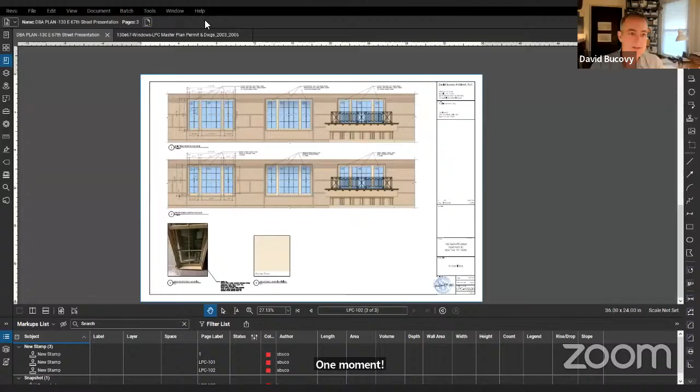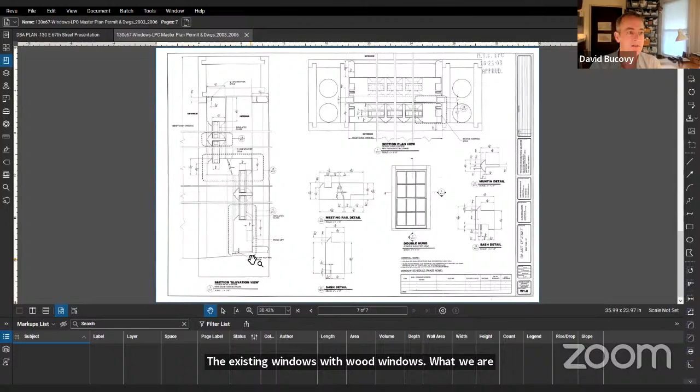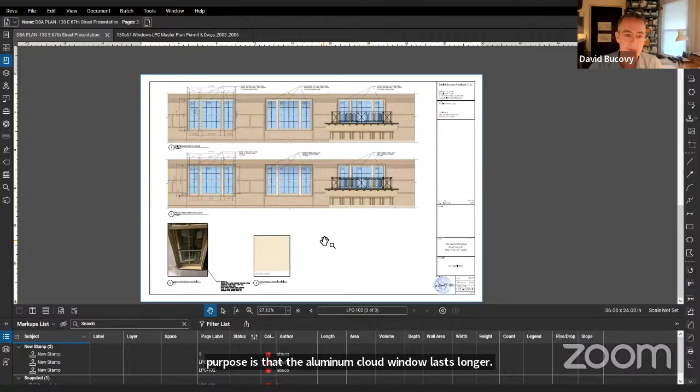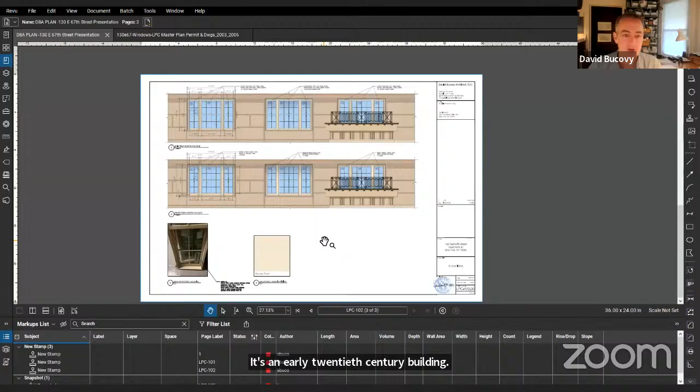One moment. So this building on East 67th Street has a master plan, which I'm showing right here, which was approved in 2004 to replace the existing windows with wood windows. What we are proposing as an amendment to the master plan is to permit the use of aluminum clad windows. These are windows that are mostly wood, but the wood is clad on the exterior with aluminum. The purpose is that the aluminum clad window lasts longer. The wood window does have to be periodically repainted. This is just a more durable approach. We understand that it is approved elsewhere in the city, especially in the context of a large building like this. This is a multi-story building, an early 20th century building. And that is essentially the purpose of this application to landmarks.

In all respects, we are going to maintain the other aspects of the window, the percentage of glazing, the muntins, the overall detailing of it. This is uniquely a desire by the shareholder of the unit to replace their window with a more durable, long-lasting system of fenestration. I believe clad windows existed in the early 2000s, but I think over the past couple decades they've become much more widespread in use.

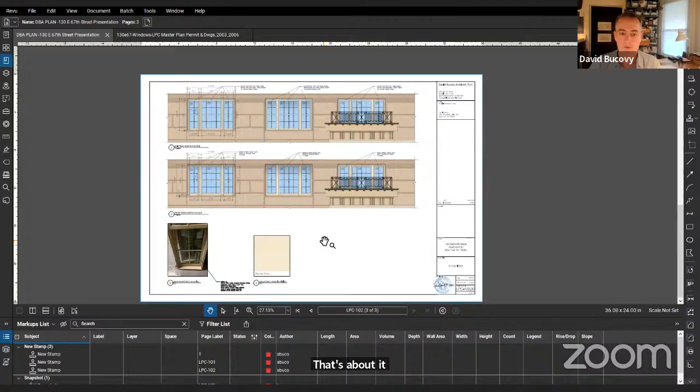That's about it. Is there anything else you want me to explain? I'll just ask you before you continue, or before we go to the public: how many windows are we talking about at 130 East 67? How many windows are there in the building? Well, I actually, forgive me, I don't have a count. I would say, just looking at the photos, that this is a corner building, and there are some kind of inner courtyard conditions. I would say there's probably 200 windows.

Okay. And when you said, are any of the windows now still wooden windows? I'm assuming some windows have been changed to the new wooden windows. Yes, there are still original windows in the building. There have been replacements. The one in 2004 was a replacement, when the master plan was created. I think from what I read in the original certificate of appropriateness related to the master plan, it was motivated by one unit owner who wanted to replace their windows, and for whatever reason, it became a master plan rather than just an individual project. And in our case as well, this effort is motivated by a current unit owner somewhere else in the building who also wants to replace their windows. And rather than, because there's a master plan, this is an amendment to the master plan, a request for an amendment rather than just a one-off individual project. So sorry, a long-winded answer, but yes, there are many existing original wood windows.

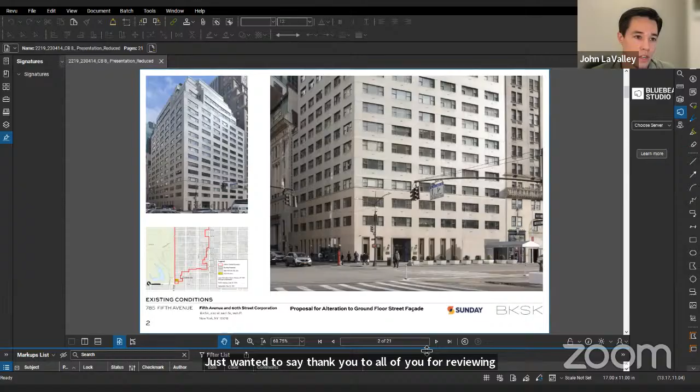The location of 785 Fifth Avenue is at the corner of Fifth Avenue and 60th Street, at the very, very tail end of the historic district, as you can see on the lower left.

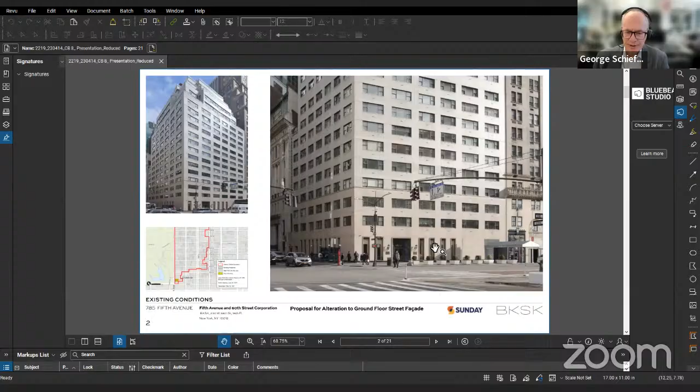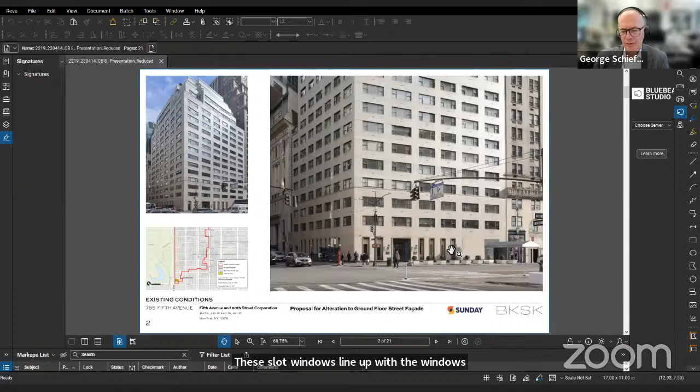Keep in mind as we go through the proposal what the existing looks like. It is a series of slot windows surrounding a commercial retail entry and a residential entrance on the right-hand side, south side of the building, on 60th Street. These slot windows line up with the windows above, and our proposal is not essentially to extend beyond those borders, but to eliminate these center piers and create larger openings on Fifth Avenue and on 60th Street.

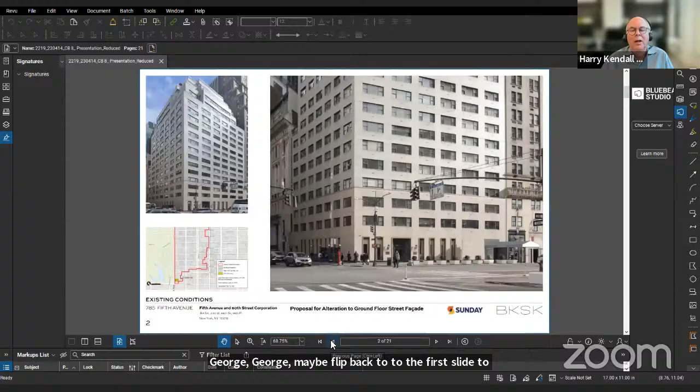George, maybe flip back to the first slide. Now that you see what we're doing, you can see the lower scale of the openings and the large sort of opaque band above them before the windows start on the second floor.

We've also, as I mentioned previously, continued the existing limestone surround all the way around each retail opening, and we have added new fixed canopies at the retail entrances. We are proposing in this rendering, showing 2 entrances. It could be 1, 2, or 3 tenants that we are likely to get for the retail space.

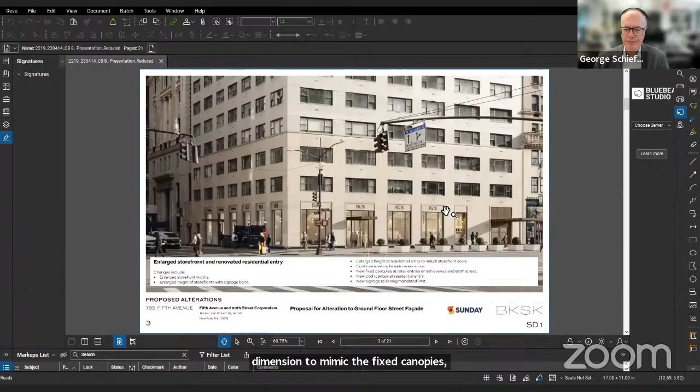At the residential entrance, there'll be a new cloth canopy with a minimal dimension to mimic the fixed canopies, and it'll extend out to the edge of the sidewalk the way the current one does. We will have new signage in the signage band above the retail entities, and that will comply with zoning and extend all the way around from 5th Avenue to 60th Street.

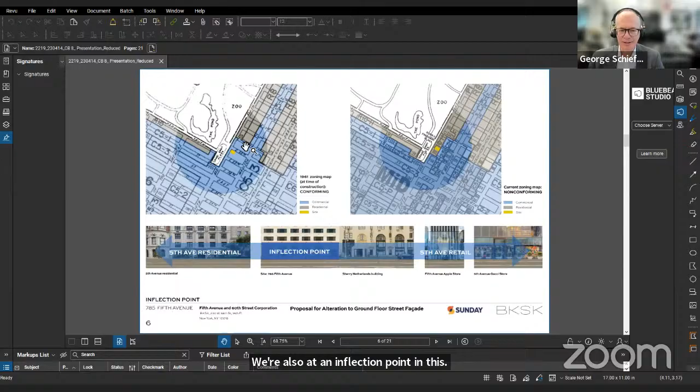We're also at an inflection point in the context. Previously, when the building was built, the commercial zone extended up past this building to 61st Street and went east to west along 60th and also 61st. Now, the residential zone continues down, includes our building, and pinches in at this point so that we are an existing non-conforming use. Our retail presence is therefore allowed to be in existence because it was in existence previously.

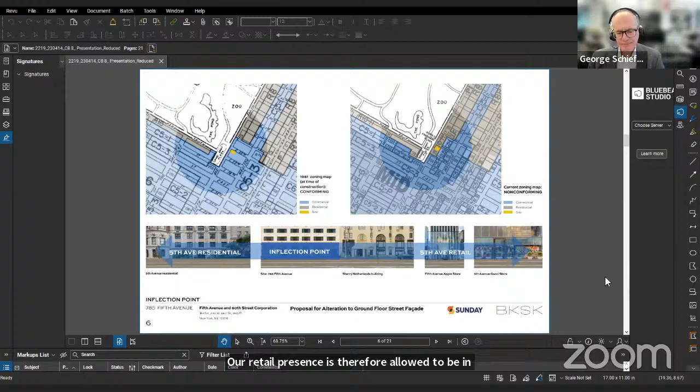When we look south along 5th Avenue, the retail of 5th Avenue begins to predominate, and the character of 5th Avenue below this block to the south changes: each individual building is primarily denoted, governed, subservient to an expression of the retail entity that occupies its space. So we get large signage, fixed canopies with signage, two-story readings of the retail. As it continues on down, we have a very transparent Apple Store and very different kinds of bases, including glass and stone.

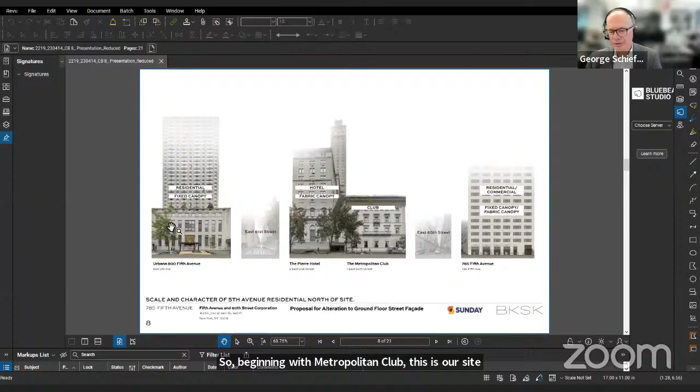As we go north on the site, it's Fifth Avenue and all of its elegance, beginning with the Metropolitan Club. This is our site, the Metropolitan Club, the Pierre Hotel, and on up to residential. Again, little expression about retail and quite an expression of stone and beautiful detailing.

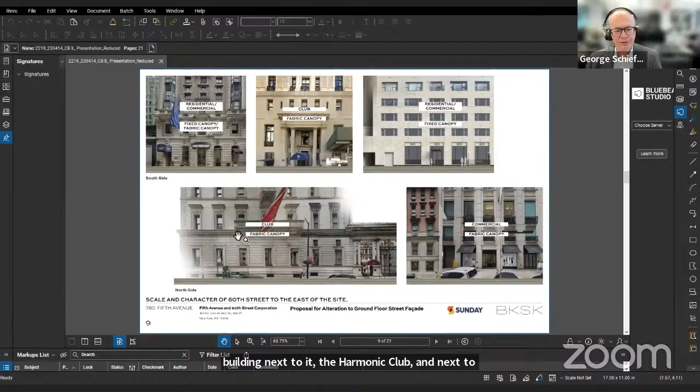As we move along eastward on 60th Street, our building is next to the Harmonie Club, and next to that, both retail and commercial buildings. On the other side, the north side, we have the Metropolitan Club, and then the former Barney's building all the way on Madison - again, residential and commercial intermixed. As a side note, the canopies are often both fabric and fixed, and sometimes the retail has the fixed canopy and the residential has the cloth, and sometimes that's vice versa.

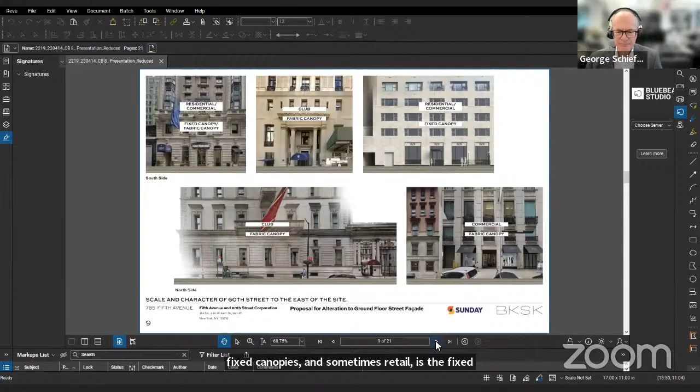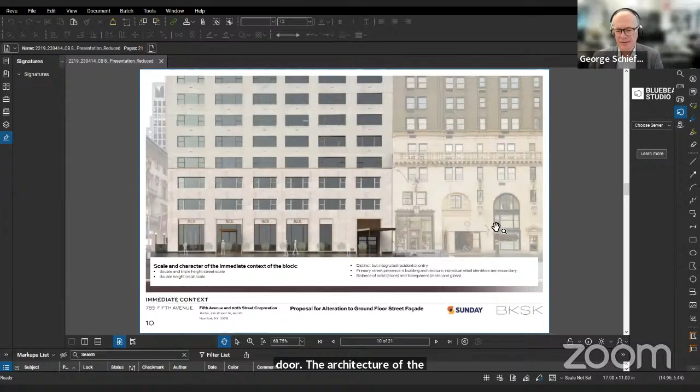Our block is at that inflection point, and it's important that the tenor and feel of the retail in this location changes, and that is what we've tried to do with the architecture. Much like the Sherry Netherlands next door, the architecture of the building, its base, its qualities, extends down to the street, and the retail no longer dominates. It becomes more of a balance between the two.

On the Sherry Netherlands, we have double and triple height scale. On our building, we've increased that scale to match to a degree what's going on in the Sherry Netherlands. The residential or hotel entry of the Sherry Netherlands is integrated into the facade and its expression, but also different. The metal and glass to either side of it and the stone at the entrance to the Sherry Netherlands is just a subtle reinvention, a reassertion of something different happening in that bay.

We are doing the same thing, extending our scale up, and then when we get to the residential entry, both separating it from the storefronts and creating a slightly different expression in terms of the materials as they move up inside the scale of the new surround. There's a balance of stone and transparent metal and glass that exists on our block, so that we are at that inflection point between a very solid retail expression and a much more club and residential expression.

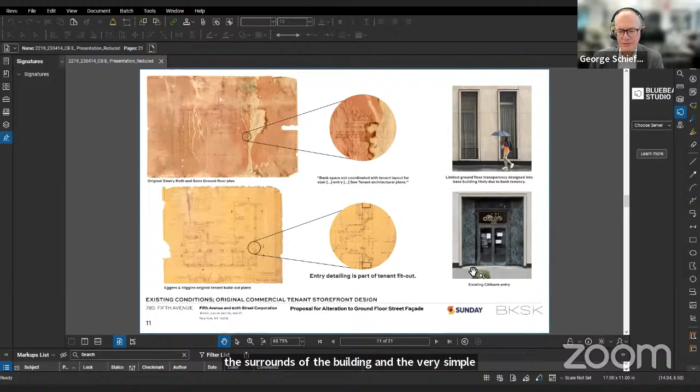Just a quick segue into what was the original intention of the architects, Emery Roth and Sons. Very poor existing drawings, I'm afraid, but enough to note that the surrounds of the building and the very simple architecture there was intended, and that at the current Citibank entrance, that was left open as a base building expression and specifically relegated to a tenant improvement.

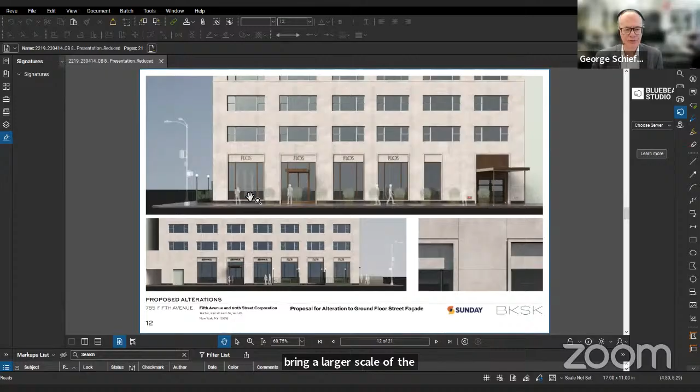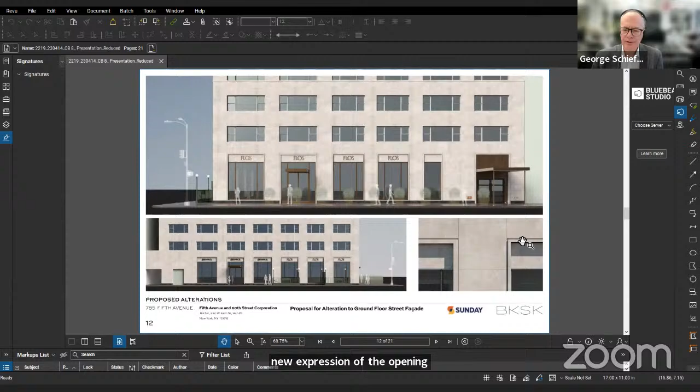So again, our proposed alterations are to bring the larger scale of the storefronts by eliminating that existing center bay. The height of the glass is what it is, similar to what it is now - it matches what it is now at 11 feet high. Then there's about a 2-foot signage band that is also expressed in limestone, and the current profile of the surround is copied and brought up and around the new expression of the opening. The only difference between the existing surrounds and an expression of entry is that it gets slightly wider at the current entry expression than at the other storefronts.

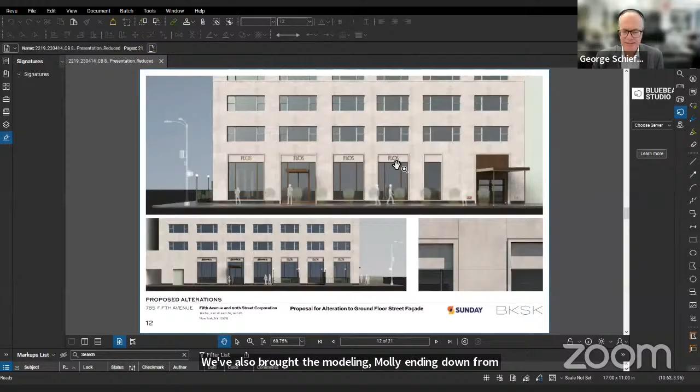We've also brought the mullioning down from above. We've maintained the scale and the height of each particular opening and the size of the glass. We've given it some differentiation by bringing that basic mullioning down to the floor, down to the street, excuse me.

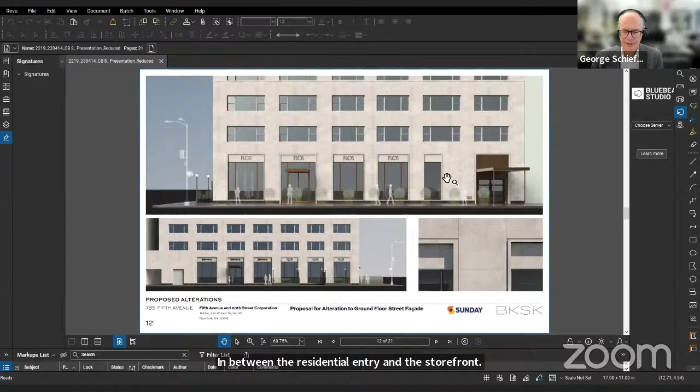In between the residential entry and the storefronts, we've added a storefront window at this point, but kept a substantial amount of limestone between residential entry and storefronts. We're playing a game between making a clear differentiation between the presence of the residential entry and the presence of storefronts, but simultaneously increasing the visibility of retail and commercial on the first floor at that point.

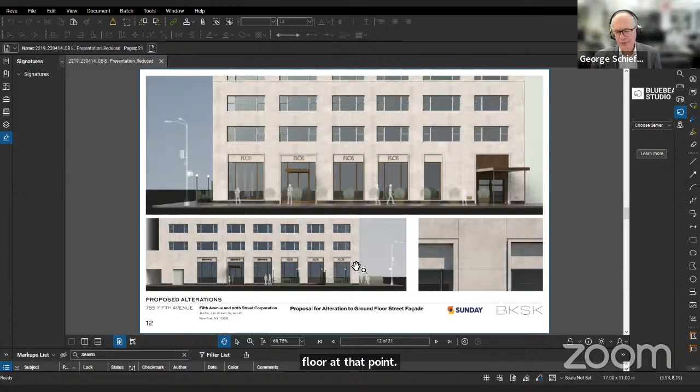This expression would continue around onto 60th Street, so that we do the exact same patterning all the way down 60th Street to the point at which there is a service entrance and a parking garage entrance that essentially remain the same. Again, there's a possibility of having a new or different tenant in, say, the last 3 bays, and perhaps another retail entry at that point.

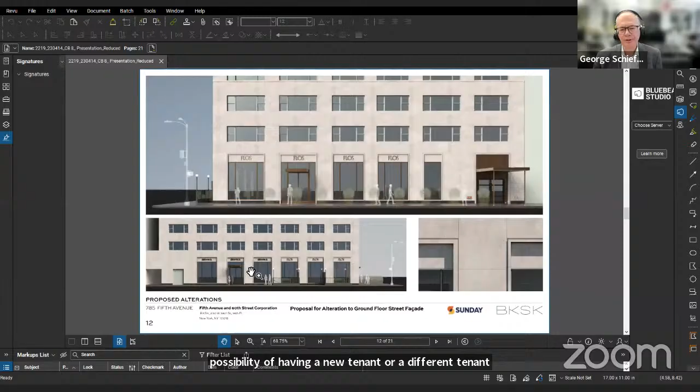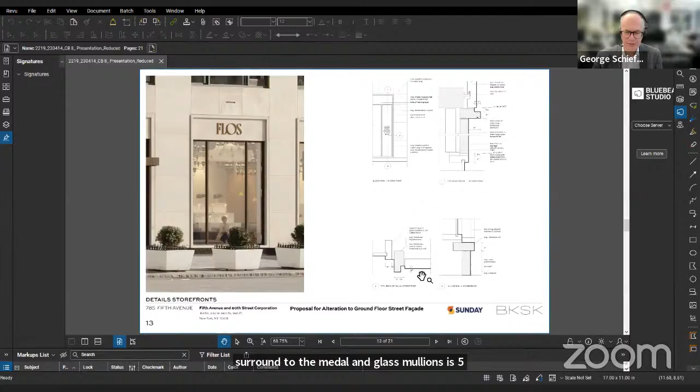That's what it is now, and that's what it would be in the future, with both the signage zone and the limestone aligned with the face of that mullion. At the bottom, the existing surround continues, and the granite sill at the base of the building, which is existing, would also remain.

Our materials are oil rubbed bronze for the metal of the mullions. The existing limestone is a buff existing Indiana limestone, with a sort of sanded rough exterior. In the signage band, we would buff hone that Indiana limestone, so it would have a slightly more polished appearance than the limestone around it. We believe all of the limestone, except perhaps this buff honed signage zone, would be existing material reused. We have enough of it and can manipulate it so that we retain the aged quality of the limestone in our new work.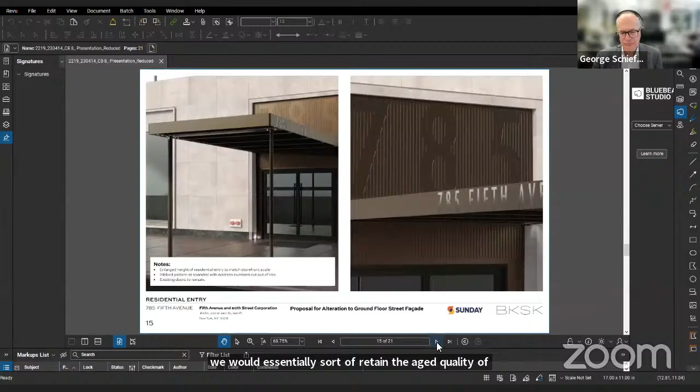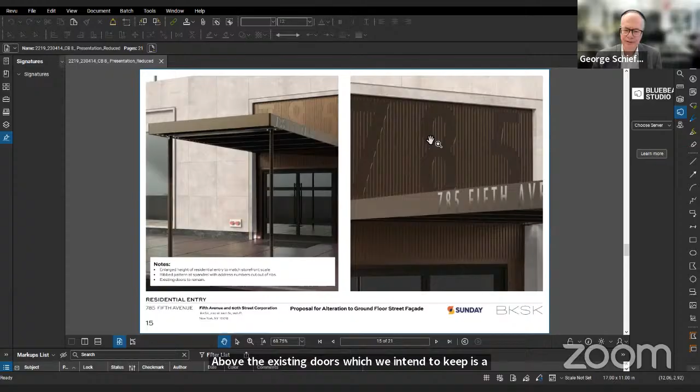At the residential entry, we are again having the scale of that entrance match the scale of the retail and commercial adjoining it. Above the existing doors, which we intend to keep, is a graphic of the address. It's sort of played down, a ribbed pattern that matches a ribbed pattern that exists on the inside of the lobby in wood, and here it exists in oil rubbed bronze. We take out the ribs at the large letters so that there's a very subtle reading of the 785.

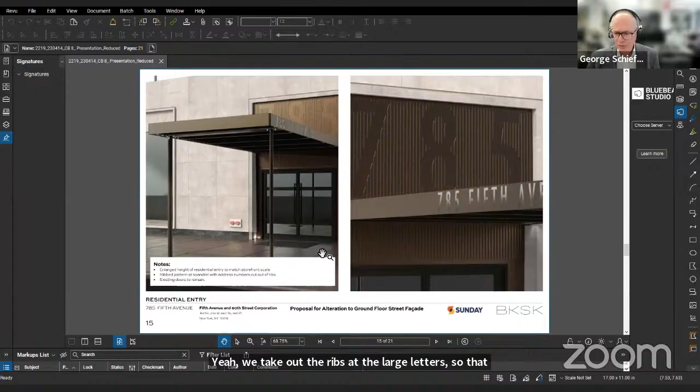The existing doors are to remain because they are special doors. They have been put in place to guard against some of the demonstrations that have occurred in the area, so they have a certain security feature to them.

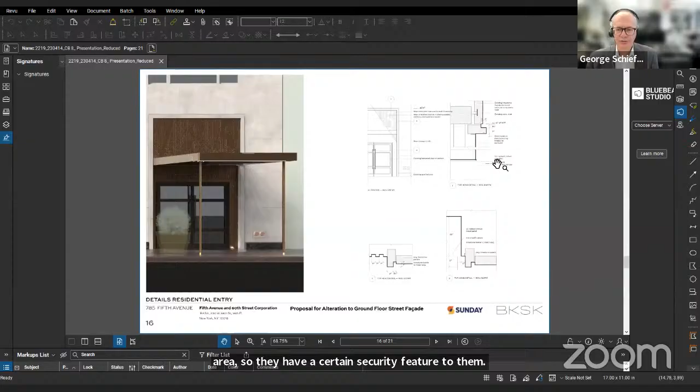The details at the entry again mimic the 5-inch recess from the face of the existing surround, showing some of the ribbing, which is 1 inch and 2 inch, and along the side where the entrance is, a deeper return to the entry doors.

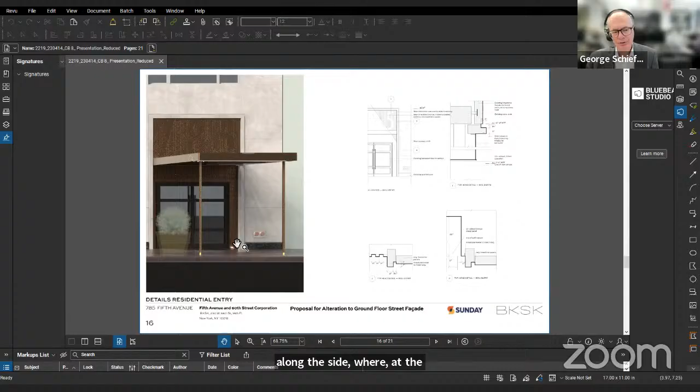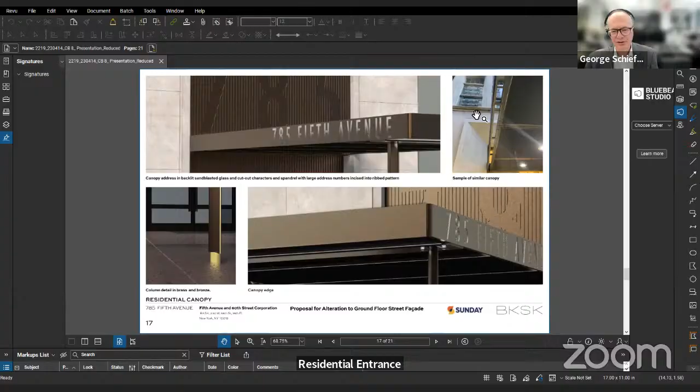The canopy would be glass with a metal border, so it has a thin expression like the retail canopies, but needs to be lighter as it extends out to the sidewalk. There's also, for the most part, a precedent of cloth canopies being at residential entrances. This is an image of an existing, similar canopy installation where there's a metal frame, and just outside of that is the continuous metal border, which allows water to drain down the edges like a similar cloth canopy would.

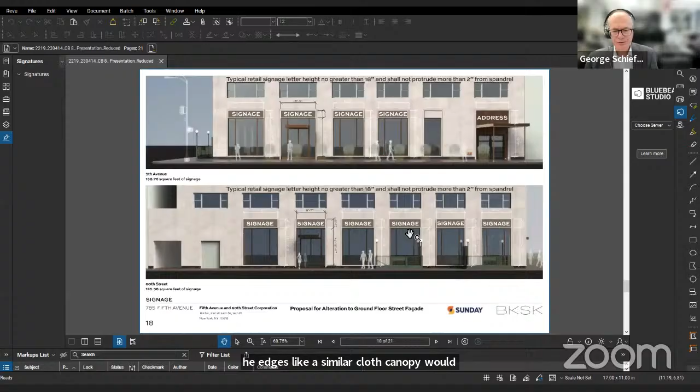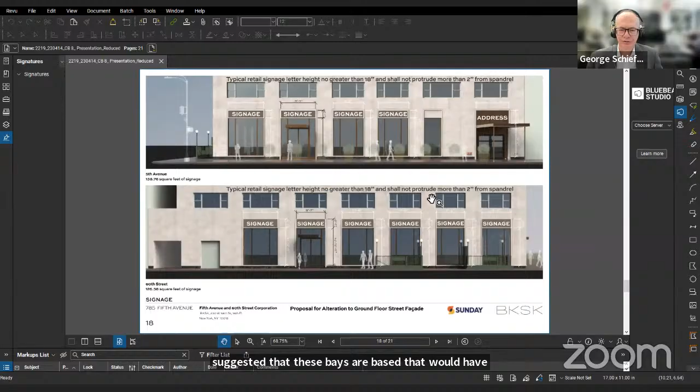Signage: we are proposing signage that is essentially in compliance with zoning. Because it's existing non-conforming, we've taken the smallest area standard we can apply to it. We've suggested that these bays are bays that would have signage for the retail commercial use on the interior. We've left this one without signage so that the differentiation between retail entrance and residential entrance is more clearly marked. The signage will be no greater than 18 inches and shall not protrude more than 2 inches from the spandrel.

We're making an argument that signage be allowed to exist in all of the bays of the commercial space. It's important to the visibility of the retail and commercial. We are at the end of a commercial presence on Fifth Avenue, and while it's important for us to be within the feel and spirit of residential development to the north, we also need to be expressive of our retail existence to anybody coming from the south. So signage becomes very important to any retailer, any commercial entity.

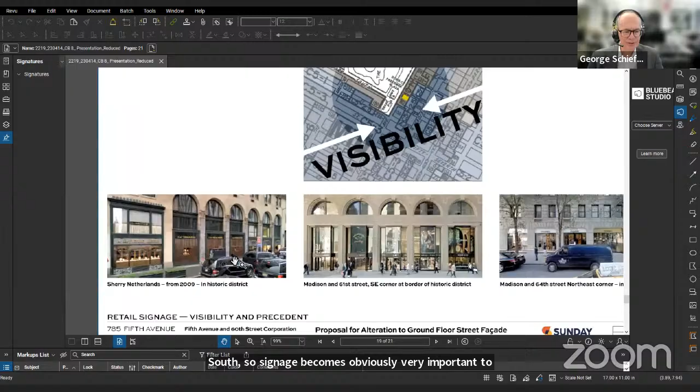A couple of examples of that: the Sherry Netherland, with continuous signage at one point in time on Madison and 61st, at the border of the historic district. And signage again between the limestone expression of the base on Madison and 64th Street, northeast corner, within the historic district.

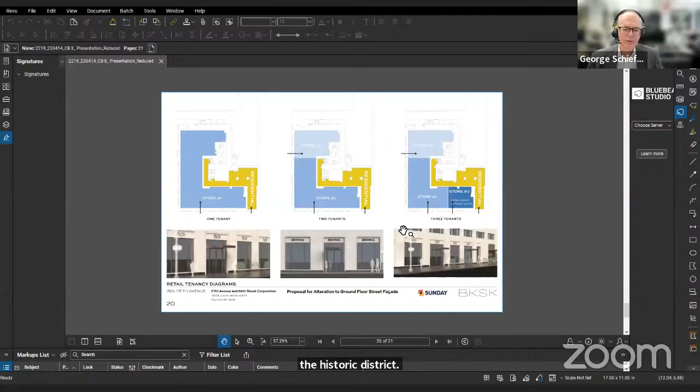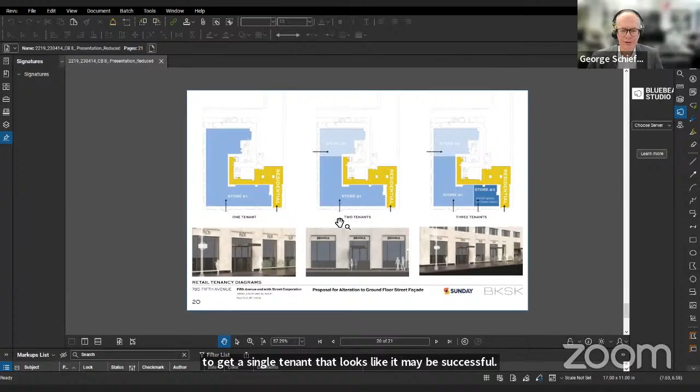We are asking for an approval that will allow us to put retail entrances with rigid, fixed canopies at 1, 2, or 3 locations. I think the primary effort is to get a single tenant. That looks like it may be successful, we'll see. But we would like the ability to have an entrance at this point for a single tenant, an entrance at this point, and an entrance on 60th Street for 2 tenants, and an entrance at Fifth Avenue and 60th Street, perhaps an entity with a small footprint on the first floor down to a larger lower level, which is also commercial as a possibility.

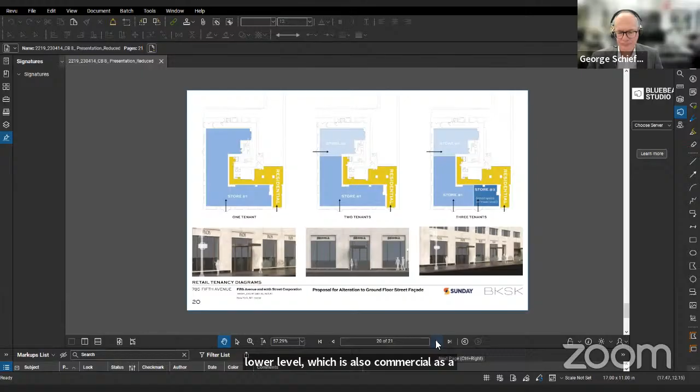That's pretty much it. Thank you very much.

We feel our proposal enhances the street frontage and doesn't detract from it. We've had some good support from the neighbors. Robert, you might want to just quickly run through our community outreach.

We did extensive community outreach, and every entity that we reached out to that asked for a briefing, we gave full briefings. The buildings to the south, east, and directly to the north, the Sherry Netherland, the Harmony Club, and the Metropolitan Club, collectively wrote a letter of support, which we submitted to Saida on Friday. They were excited and saw what we're proposing as enhancements that would improve the neighborhood and improve the building.

The only other thing George touched on, but I thought it might be worth saying a little more about the tenant improvements that were there versus what the architect intended originally for the ground floor. Can you touch on that again, George? Go back to the existing drawing sheet.

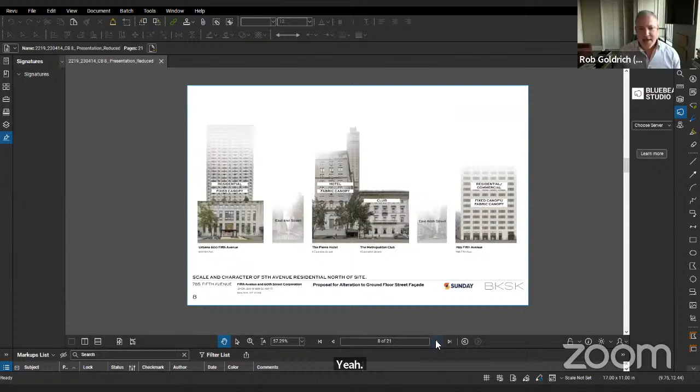It was a tenant improvement to reflect the nature of a bank tenant and what they needed during the time, but it wasn't part of the original drawings. As an architect, I think what you're getting at is that the nature of a bank tenant when this was built was of a private bank that would have wanted privacy, and the nature of even a bank tenant at this point is very different, looking for openness and exposure to the street.

So that is important to what this particular co-op is trying to do with its retail presence on the street. Did I cover what you were looking for there, Rob? Yeah, I think that explains it.

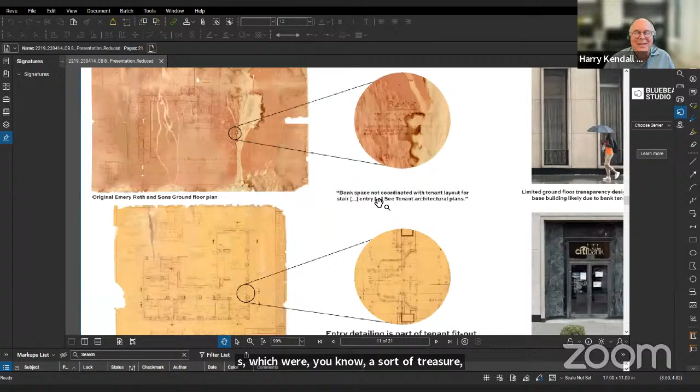What we learned from the original drawings, which were almost lost to history, is that the building architect, Emery Roth and Sons, we think knew it was going to be a bank tenant and delivered the smaller openings because they thought that was appropriate for the level of protection a bank would offer in that era. It was the predecessor to Citibank.

Citibank wasn't the original tenant, but Franklin Bank ended up joining Citibank as a larger entity. So then it was a separate architect, Eggers and Higgins, that did the build out and the details of the Citibank entrance. The intentions of the original architect were just to attract the right tenant and deliver that balance of protection versus visibility that a bank required in the 1960s.

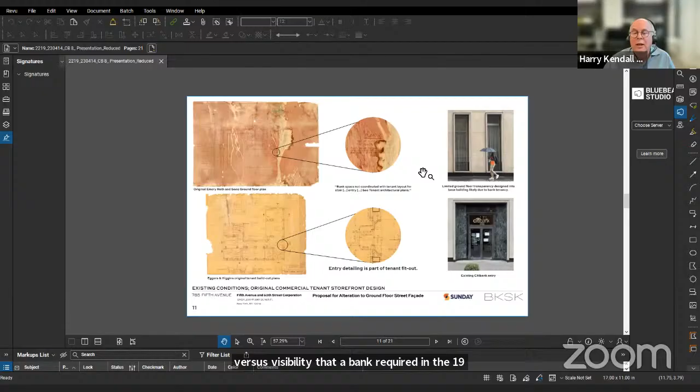Things have changed a bit, and in all candor, it wasn't the most elegant solution at the base. As George said, we think what we're proposing ties the upper floors and the lower floor together in a way that the building had been wanting. But I really leave that to you to discuss.

Well, thank you for a very thorough proposal. Let's go to the community and see if anyone has a comment.

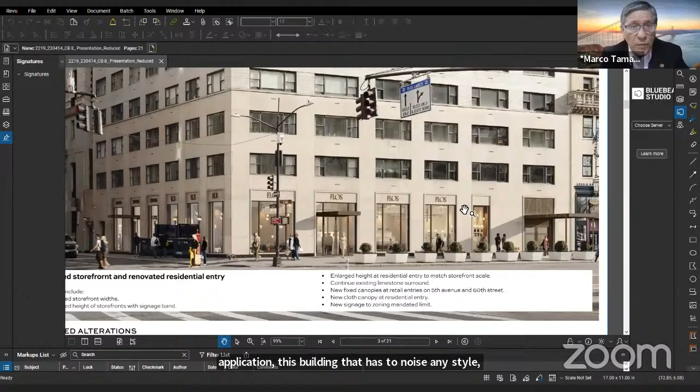I think it's a very reasonable application. This building has no particular style, and I think that allows a large flexibility to propose something different. George, you did a very good presentation. Even though when you speak too much you confuse everybody and lose your presentation, I'm sorry for saying that, but the presentation was clear. Sometimes you made me change my mind, but clearly you did a very good job. Your proposal improved that part.

Yes, I have some comments that made me a little concerned. Is the signage too much? I know that you use the zoning resolution to establish the dimensions, but I don't know if it's too much. It depends on the tenant, and commercial spaces always need more signage. I agree with that part.

The canopies, yes, they don't bother me so much. I think it's another way to establish the differentiation between one tenant and another, and that is perfectly fine. And the part that made me a little concerned, even though it is nice, is the number on the residential entrance on top.

It is covered by the canopy, and you don't need to make the numbers so big. That doesn't work unless you are across the street, probably, and for the rest you're not going to have this kind of information visible.

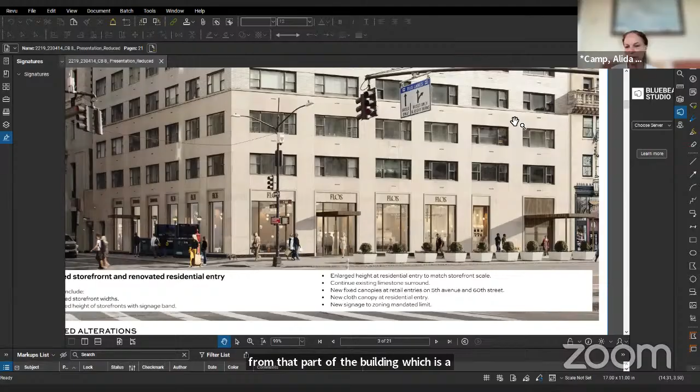Thank you, Alida. Michelle? Yeah, excuse me, thank you. Presentation was clear and it was excellent.

Let me start going from my side, right to left. I don't know how you're seeing it. The 785 that's set into the facade above the canopy over the residential, I think it's a nice use of those materials, but I don't think it's needed here. I think it's overkill and intrusive. So from my point of view, I would like to see the numbers eliminated. If that happens, I'm not sure what you would continue with, I guess that's the bronze, or you would have the limestone infill. I'm not here to design it, but I would like to see the 785 removed from that space.

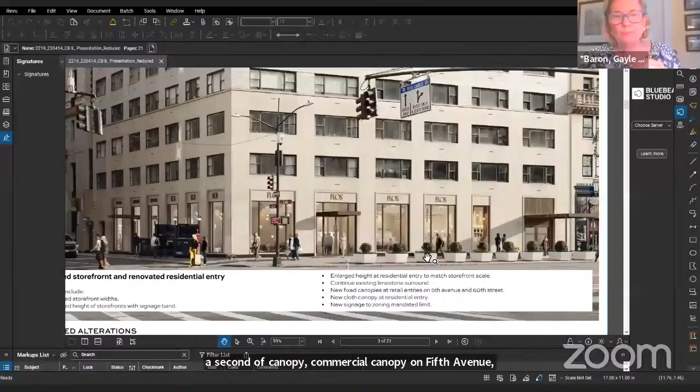I also agree with Marco and Michelle when it comes to the 785 being on the canopy, and then having, interesting as it is, the 785 among the ribbing. I still think it's a little overdone—you can see the address once and know where you are. I also look at the signage bands; I think they're a little large, but not enough to really concern me. I'm also not certain that even if there were a second commercial canopy on Fifth Avenue, it would necessarily look out of place. It might end up balancing the three large windows overall.

I do have a question regarding the oil rubbed bronze. Is that the same color as the windows above? No, it will not be. The windows above are very garden variety aluminum. Okay, those are aluminum and all. So it differentiates itself from the residential portion windows above.

There are certain things I'm still a little concerned about, but overall, I think it's an enhancement to a building that really does not shout out 'come look at me.' So I can support the application.

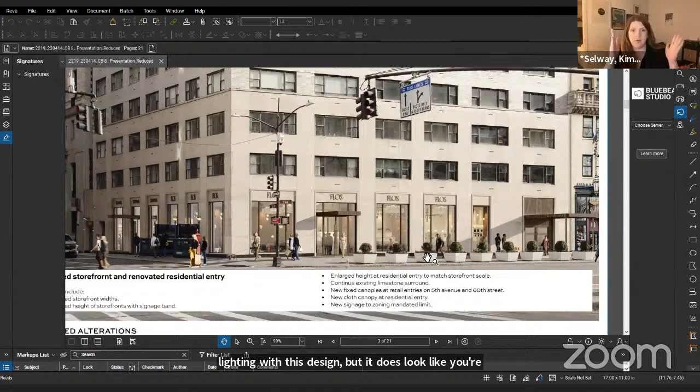Kimberly? Thank you, Aida. To echo what my colleagues have said, thank you so much for this presentation, it was very thorough. I did want to clarify something Michelle had asked relating to lighting, because I believe you said there would not be any additional backlighting with this design. But it does look like you're removing the existing lights around the commercial entrance and around the residential entrance on Fifth Avenue. That's correct.

Yeah, we're removing those sconces. I think I can support this application. I am a bit concerned, to echo what Elizabeth said, about the signage above the residential entrance. But overall, I think I can support this.

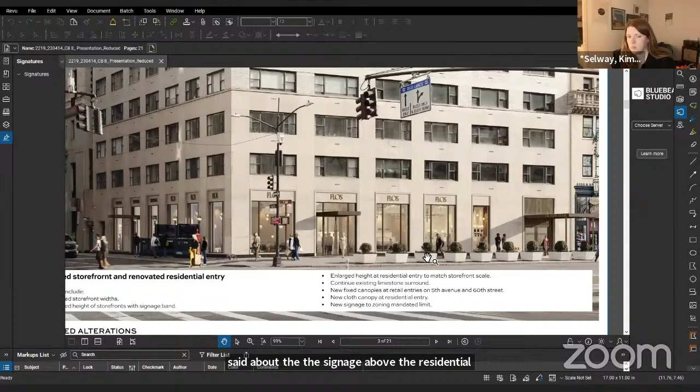I'll just make a couple comments, echoing an email I received, and David received a little earlier, from Anthony Cohen, who couldn't be here tonight. It has to do with the exaggeration of those openings, and that there was some merit to the existing layout—the narrower windows that went with the apartment windows above, fitting nicely within the bays. I know everyone wants more glass from retail, I understand how important it is in New York, especially these days. But somehow I think those narrower windows were more effective on that particular corner and going around the corner. So I cannot support the application.

Thank you. David? Well, co-chairs don't always agree, and I can support the application. I think it's very well done. I think we do have to be respectful of the fact that this is a commercial ground floor, and that in order to get tenants, they need better visibility.

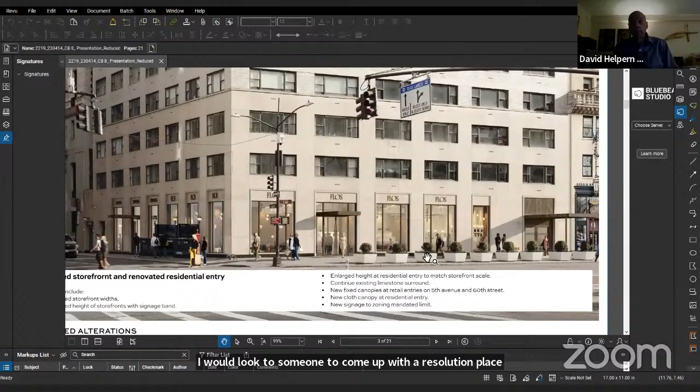A raised hand from Elizabeth. Elizabeth, a resolution to approve? I will make a resolution, but I do want to comment on the idea of the original storefronts—the value of that size reflecting the building. I think not reflecting the building above is a great advantage, and what has been proposed is far better than what was there. I will make a motion that we approve the application as presented.